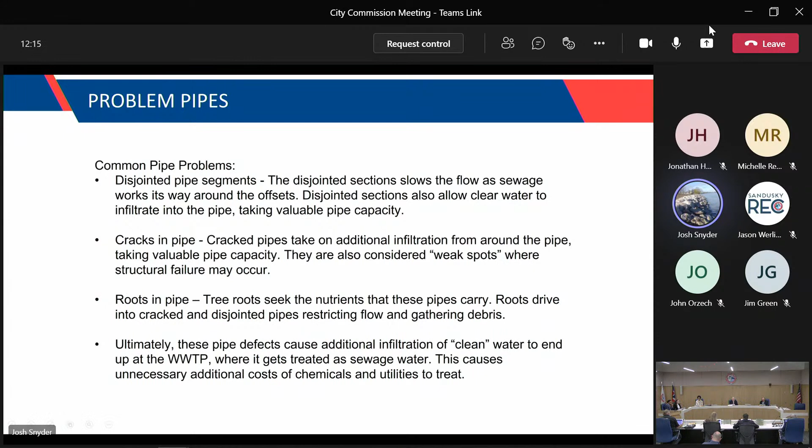So this picture, I brought this more to show pipe defects. On the right-hand side of the pipe, you'll see light-colored lines, and those are indicative of cracks in a pipe. A little further beyond that into the pipe, you can see an offset, and this one's pretty bad in this pipe. This isn't a pipe that we lined, but I'm trying to show you some defects, and this would be something that raises lots of flags in a sewer line. So this snapshot you're looking at is what our video cameras can capture from the sewer video trucks.

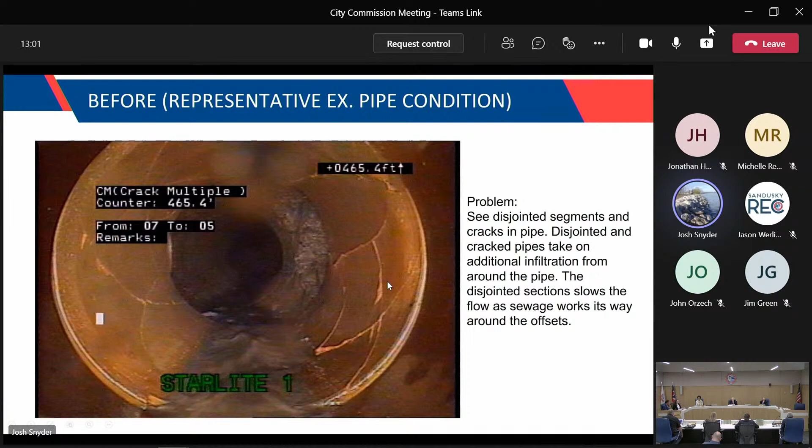Here's another section of pipe, not one that we lined. Off on the right-hand side, you can see a section of the pipe falling in. Looks like fragments of stone, but actually it's broken pieces of pipe, as if somebody drove a utility pole or something very close to it. That may cause cracks like what you see here.

On the very bottom, you see what look to be dark spider webs. These are actually tree roots, and this picture captures tree roots intruding into a joint in a pipe, trying to get to that moisture, that flow right at the bottom of the pipe. You can see why these are problems. Tree roots collect anything that comes along the stream, so oftentimes in these videos you can see toilet paper hung up in them, other objects, and that obviously restricts flow in a pipe.

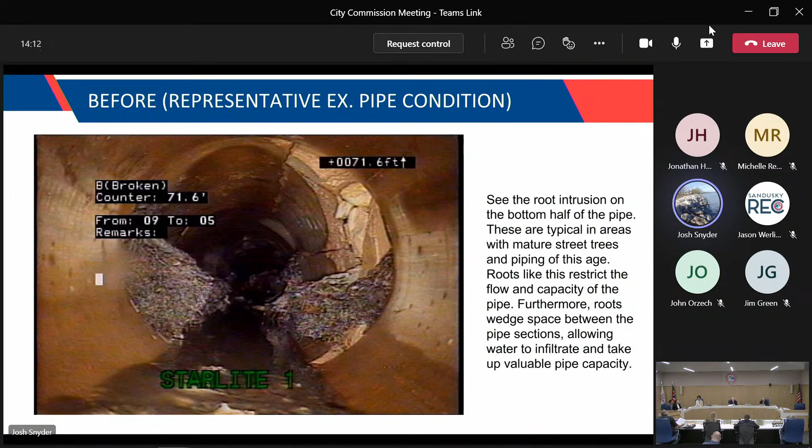This is actually a section we did line. This is Warren Street. If you can imagine Warren and Monroe, there's a manhole right in the intersection. I'm going to talk a little bit before I start the video.

Here along the outside, you can see it's slightly disjointed. You can see the next section of pipe here and even here into the distance. So it's slightly disjointed, not cracked terribly from this snapshot, but you can see a lot of debris.

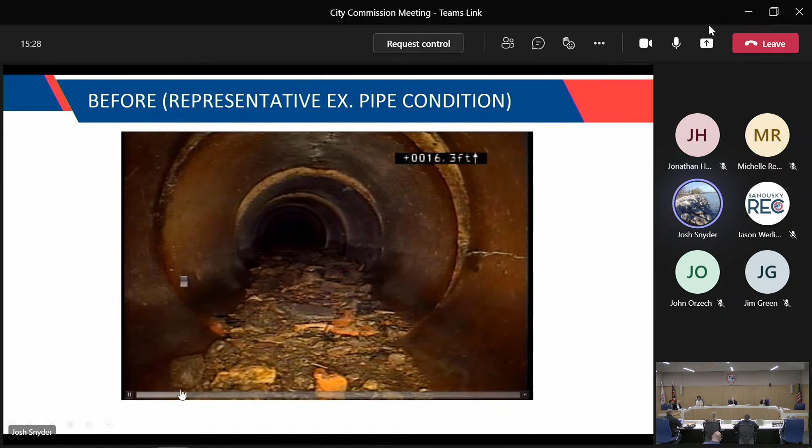So this video I'll be starting here in a second is actually pre-lining, before we even cleaned it. This is how you're looking at what a guy in the camera truck would be watching. As he's going along, he notices things and pauses the camera to make notes. You can see some of the notes made, but the debris at the bottom is obviously something to bring your attention to. Now I'm stopping it here, and you can see a crack on the right-hand side.

You see this is disjointed, and again it's starting to become pretty significant, the buildup. This is mortar, this is possibly pieces of broken pipe, looks like stone debris. So this has built up over some time.

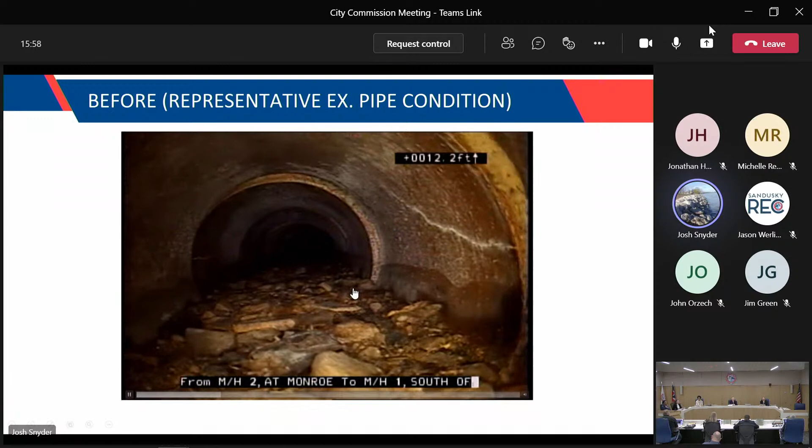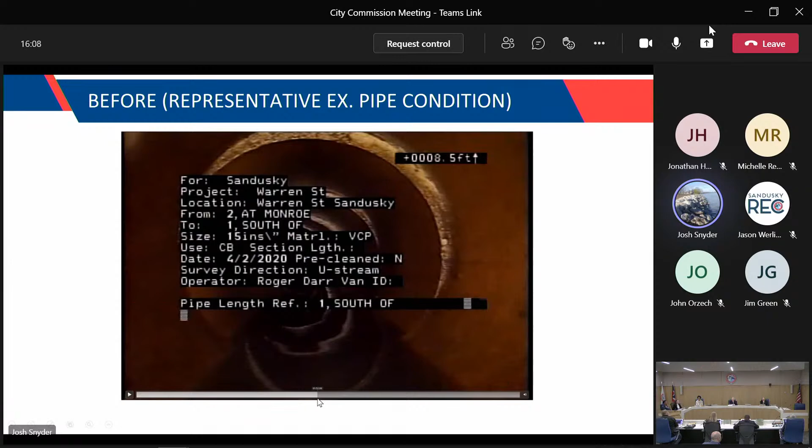I'll kind of skip ahead here because it's just a lot more of that. And here again, you can see how segmented and disjointed the pipe is, and how it doesn't run true and straight. That's okay for a candidate for lining.

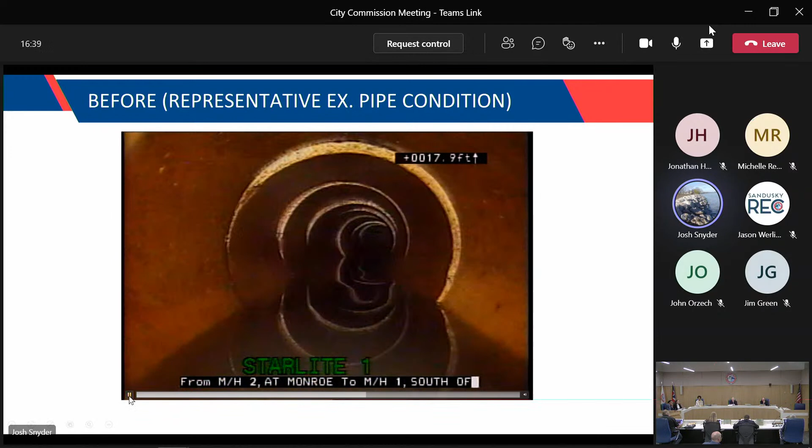The one that's fully circular, you can even push on it, and you can see it actually adds structural strength to a pipe. So again, those little cracks that we saw are really a non-issue for sewer lining. In fact, these do reinforce pipes.

The inside you'll notice is rather smooth, almost like a PVC plastic type pipe. You'll also notice a seam on the inside of the pipe, and that's actually where the material gets folded for transportation purposes when it comes on the truck.

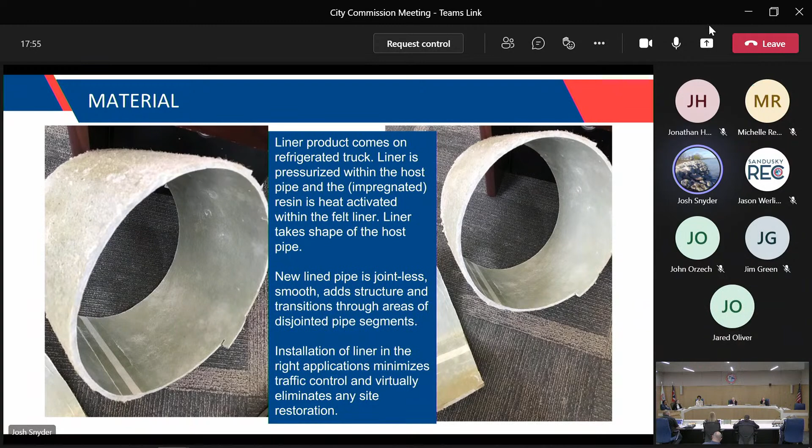The good thing about doing this in the winter is this material actually comes on a refrigerated truck. The way this sets up or cures out is that the resin impregnated inside that felt doesn't get activated until it's heated up. So the guys working in this cold weather, they don't like it, sure, but honestly, for the sake of the material, it's kind of an ideal time because the material is really workable and they don't have fear of it setting up.

We actually had a hot day late this summer, and the refrigerator part of the truck quit. The crew hauled it from Cleveland to here, and by the time it got here, it had hardened up on the pallet inside because it got too warm.

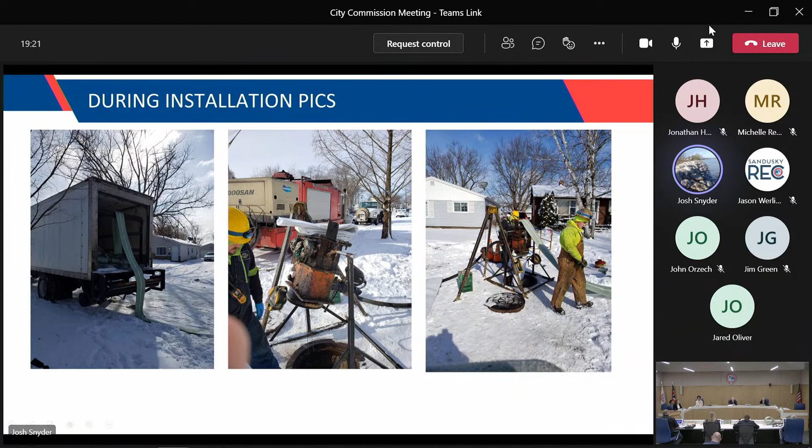So what you see in the right-hand picture, and in the center picture, is the lining material coming off the truck in the background. It goes over a roller so it doesn't get twisted one way or the other, then enters the manhole. You can see it turn white there on the downside of the frame tripod they have set up, and it's actually inverting upon itself.

On the bottom right-hand side of the center picture, you'll see pure soybean oil. That's used as a lubricant, so they can turn that piping material onto itself, or invert it upon itself, once it's down inside the hole, and they apply air pressure to it.

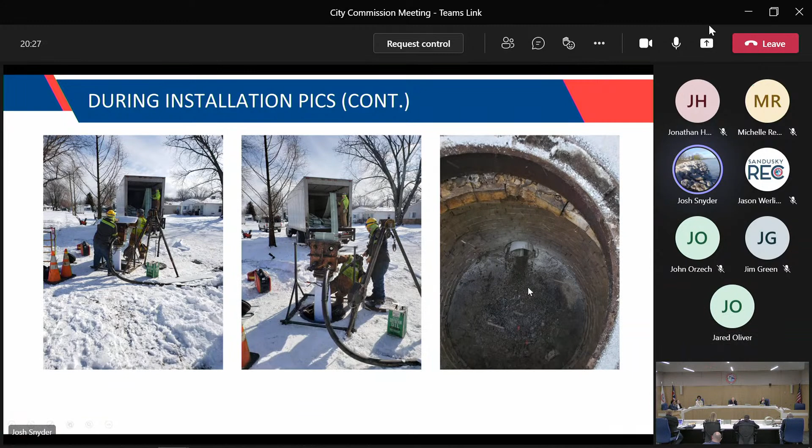The far right picture shows the very end of a run, where they cut it off. This could conceivably be where they cut off a section like what you guys are passing around in your meeting there.

Just some more pictures, all out in Larchmont. Now this is the exact same pipe we just looked at, even within the same 40-foot segment, starting at Monroe and Warren, going northbound. There's another manhole 40 feet away, and what we just saw with all the buildup on the bottom is now cleaned and lined. This video was actually taken last month.

As we go along here, you'll see those offsets in the pipe are not so dramatic once it gets lined. What you can't see until later in the video is there's actually a cleaning head leading this, just ahead of the video, just outside it. You can still tell it's not a straight piece of pipe, and you can see the joints, but it's now reinforced with that same liner you guys have passing around.

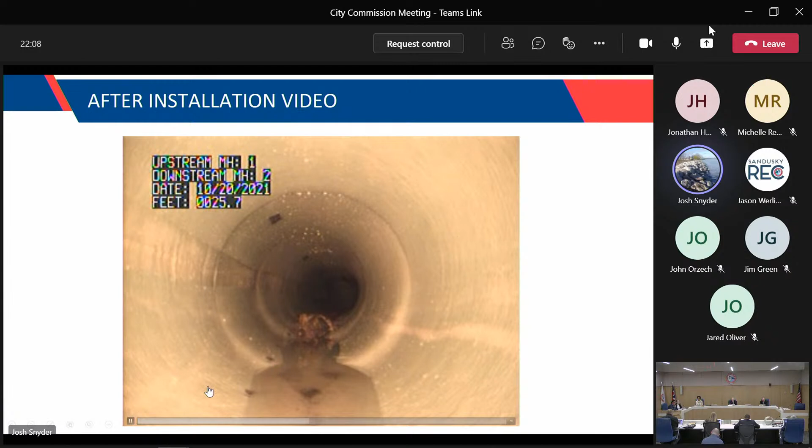Sure, there's a couple low spots, a couple bellies, and that's why water may sit like this, but once it's lined, it was formerly a clay pipe and now it's effectively a plastic pipe. That reduces the friction factor and allows sewage to flow quicker through the pipe, all while sealing the joints and not allowing roots to come in, or infiltration from groundwater and yards. So I'll kind of fast forward.

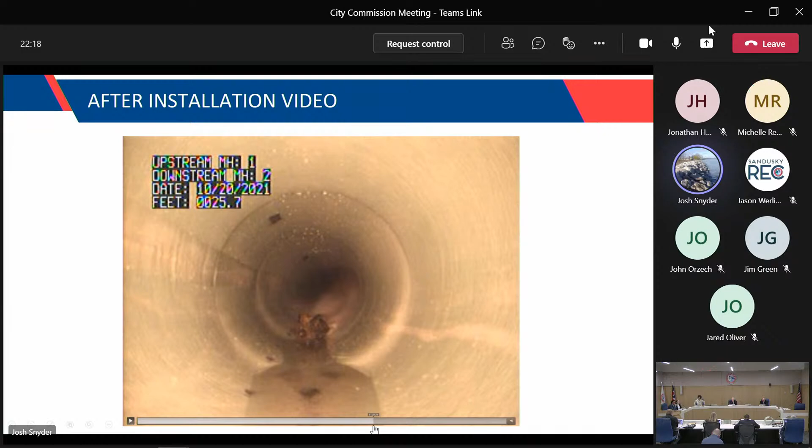Again, this is really only a 40-foot segment of pipe. There you can see the jet head leading the camera turn on, and it's getting pulled away, and the camera is now following. So I'm going to pause it right here.

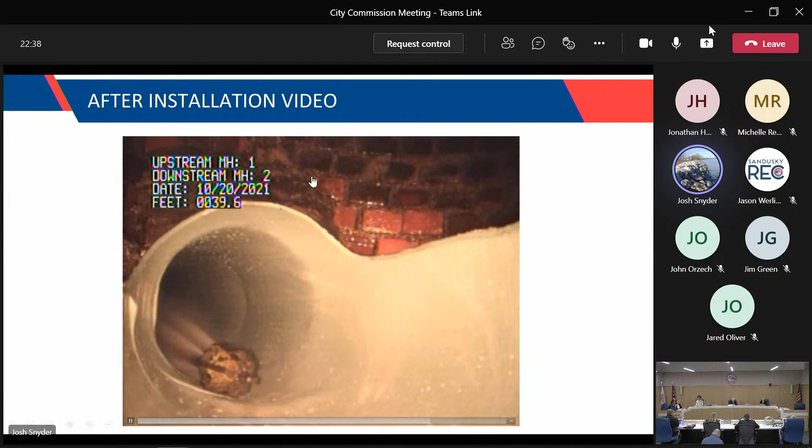What you see here is inside a manhole, the lining continued through the manhole. What they did with the liner, for access purposes, is the top side's cut open, but the bottom side, the flow line if you will, is in fact lined to keep material moving. Kind of a nice job they did here through the manhole.

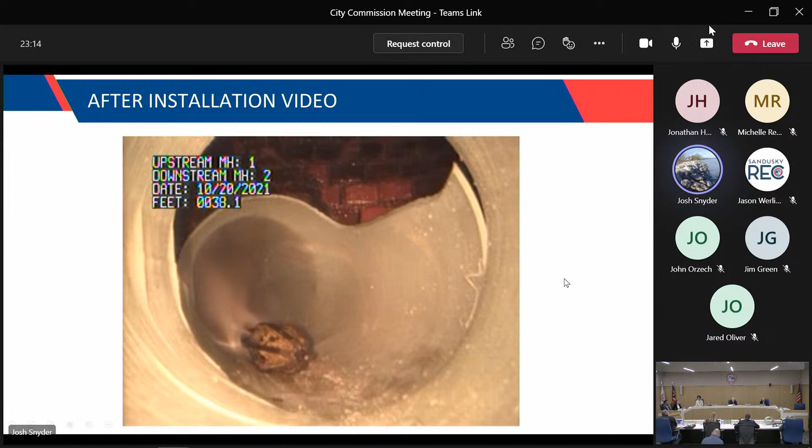The lining continues on into the next segment, but through the manhole, even this flow line is lined, and yet the top side is opened for our maintenance people to access and look and check on their routine basis. So, kind of the before and after, and that's what I wanted to show you.

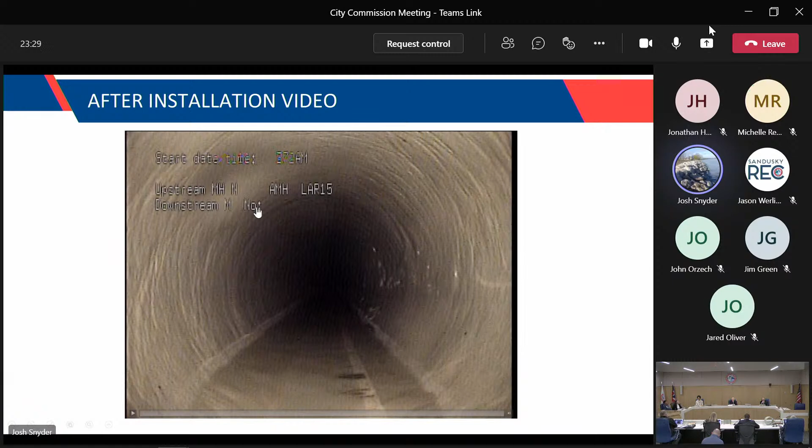Here's Larchmont, and this is after. I'm not going to bore you with another video. These were less offset segments out in Larchmont, and this made a really nice looking finished product and final video there.

These are what we get for reports after the lining has been placed. They give us a distance map of everywhere they restored a tap. So everywhere a service is tied into a sewer, they have to cut those back in. They have a robot with effectively a roto-zip blade, like a drill bit, and it knows where those tie-ins are, and it will cut perfect circles to reestablish any of the connected sewer laterals.

We get a full report when they're done. That way, if a resident calls and says, hey, this is my address, we have the resources to look up exactly where their tap was for that address and backtrack these forms to make sure they truly did reestablish the tap for that home. This is our peace of mind that the work was done, houses don't back up, and we can have this in our pocket.

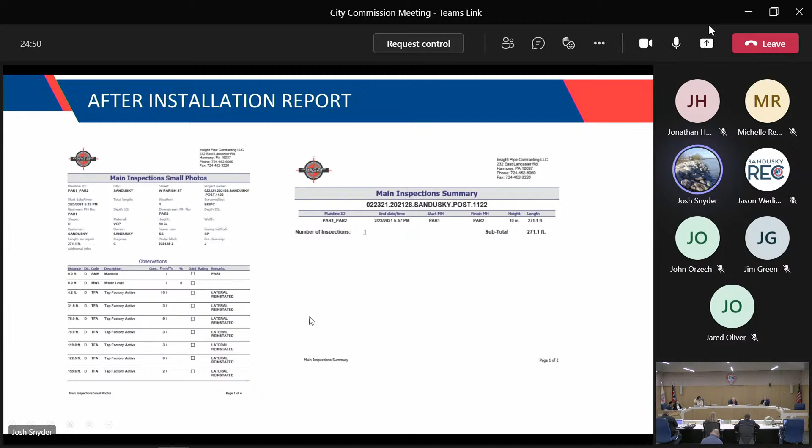Because doing what we do, there is no restoration at the surface. There is minimal traffic control because, depending on the diameter, they can run 2 blocks of this without having to have a termination point. So they don't have to have a manhole popped until they're at the end of, say, an 800-foot run, maybe 1,000-foot run, depending on the diameter that they line.

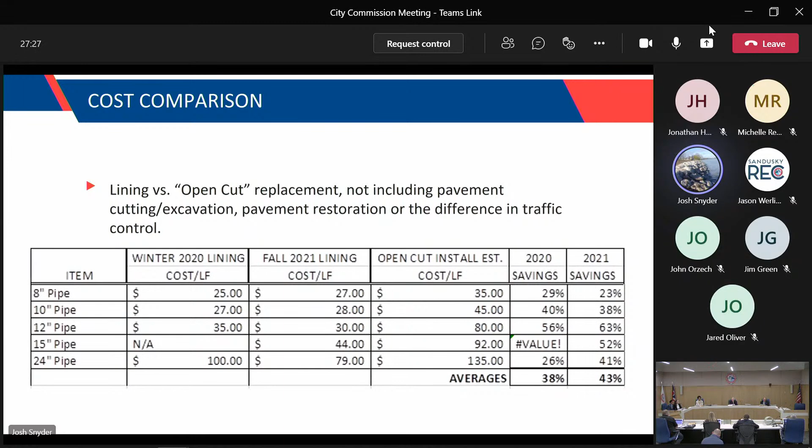Is this the answer? Is this the way to do sewers less expensively? Not every time, but at least we're tracking and we know that this is cost effective, and this is a good thing we need to keep doing on the right streets. So that's all I have.

Commissioners, questions or comments for our engineer?

Mr. Chairman, Commissioner Waddington. I'd like to ask Josh - I got a couple quick ones I'll read real fast. How old are the lines being sleeved currently? Some of them lines, I got to guess, are what, 50, 60 years old, or maybe even older?

Yeah, that's a good question. I don't have a really good record on Warren Street. I know the water line there was from 1908, but I don't have a record on the sewer.

Okay. And then my follow-up is, what's the shelf life of these comparable to what we had in prior? And then also, can these sleeves - if we have a bad area, I know you mentioned you got a cleaning head that goes in front of it, but if we run into a root problem, I didn't hear that answered. I know the old way, roots got into the system. So with the new sleeving, is there a guarantee this is going to last 15, 20 years?

The current system, I guess I would say the current system varies, and I only say that not to be political, but it depends on the type of pipe. Obviously, we have concrete in our system. We've got vitrified clay. We have some PVC, so it kind of depends on what it is. But mostly a lot of the 60s, 70s, when we were in the infancy of combining sewers, thinking that was the way to go, there's actually a lot of vitrified clay, like orange clay pipe. And that stuff is tricky because when it was laid, there's really no bell and spigot on the ends. It's really laid what contractors term butt to butt, end to end, which really lends itself to the infiltration that I talked about and tree roots.

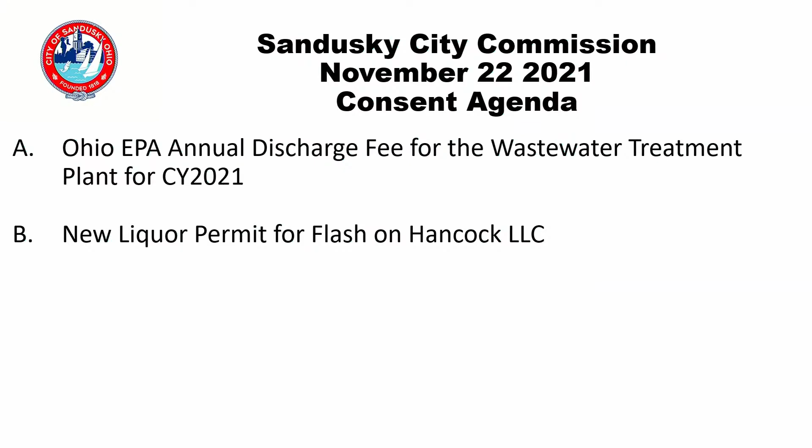Commissioners, having heard this ordinance and liquor permit hearing request, what is your pleasure? Mr. Chairman, Commissioner Harris, I'll make a motion to accept the consent agenda items A and B, and declaring that all ordinances and/or resolutions as drafted and presented to the City Commission under the consent agenda shall take effect in accordance with section reflected in the ordinance and/or resolutions, whether it be in accordance with section 13 or 14 of the city charter. Second. We have a motion and a second.

Ms. Myers, will you poll the commission on the motion, please? Yes, Mr. President. Mr. Harris? Yes. Mr. Poole? Yes. Mr. Murray? Yes. Mr. Brady? Yes. Ms. Twine? Yes. Mr. Waddington? Yes. And now on the ordinance. Mr. Harris? Yes. Mr. Poole? Yes. Mr. Murray? Yes. Mr. Brady? Yes. Ms. Twine? Yes. Mr. Waddington? Yes. That ordinance and request for liquor permit hearing are passed.

We'll turn now to our regular agenda. Ms. Myers, you present item number 1 on our regular agenda.

It is requested an ordinance be passed authorizing and directing the city manager to enter into a contract with the Erie County Sheriff for the provision of public safety dispatching services for the City of Sandusky Police, Fire, and Service Departments, commencing on January 1st, 2022 through December 31st, 2022, and declaring that this ordinance shall take immediate effect in accordance with Section 14 of the city charter.